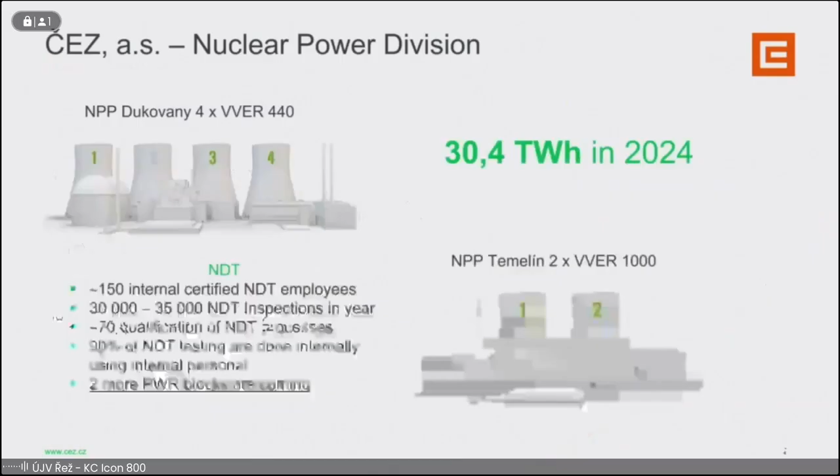We have 2 nuclear power plants here in the Czech Republic, one in Temelín, the second in Dukovany. All are VVER-designed, and the yearly output is around 31 terawatt-hours; 30.4 was in 2024, which is almost 40% of the Czech total power needs. So the nuclear division is a really important part of ČEZ and of the energy spectrum here in the Czech Republic.

Regarding NDT, what we are doing: right now we have approximately 150 internally certified NDT employees. That means 90%, and hopefully in the future 100%, of the NDT inspections we are able to cover ourselves. That's quite a huge number. The number of inspections this year is somewhere between 30,000 and 35,000 for both NPPs.

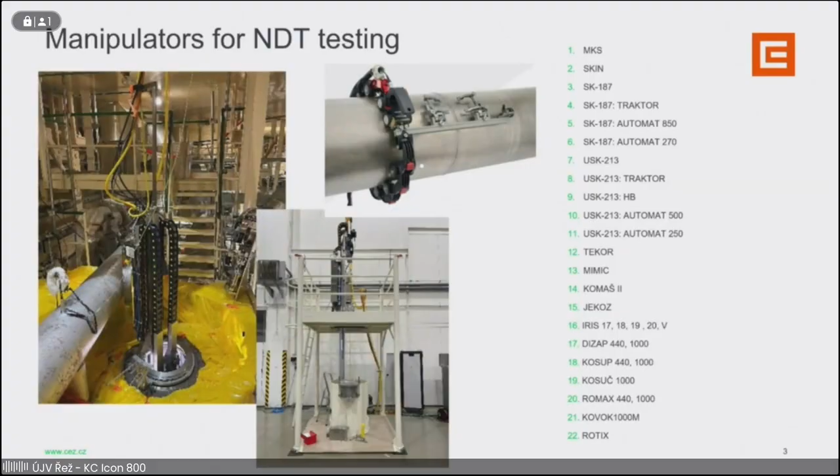So the question for today: why are manipulators so popular, maybe also a bit of an expensive topic? Why do we have to use manipulators for NDT?

Well, first, we have places in the power plant with high radiation risk, so radiation safety is of course really important. You cannot send a human inside the reactor pressure vessel, so you have to have a manipulator to perform the testing in there. So first is radiation risk.

The second, of course, is also the safety of the personnel, not connected with radiation, but you can have different types of problems in the technology which isn't really safe for personnel. So you will use a manipulator for it.

And third, there are more reasons why we use manipulators, but third is of course quality. The repeatability, the reliability, and lowering the human or personal influence of the operator is really important, and it has a high effect on increasing the quality of testing. So these are three really important points why we are using manipulators.

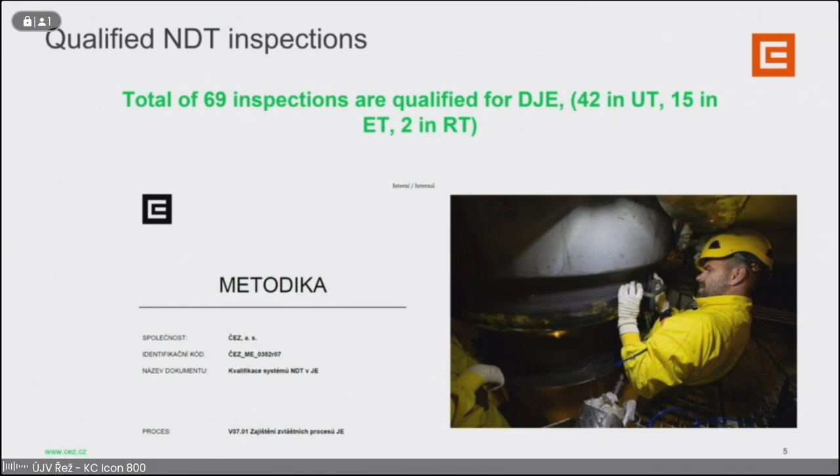As I said, we have 42 qualifications in UT, 15 in eddy current, 2 in X-ray testing and radiography of course. And let's just see three qualifications which are quite important for us.

Heat exchanger tubes of steam generators, VVER, Temelin, even Dukovany, so 440 and also 1000. As you will see later, we are using the IRIS manipulator for it, and we have a qualification for eddy current testing of the heat exchanger tubes, as you can see here.

The second, which is starting to be quite important, is dissimilar metal welds for small thickness piping using the phased array technique of ultrasound. The small thickness ultrasound testing is a bit challenging, but we have qualification. We are of course using manipulators and it seems to work pretty well.

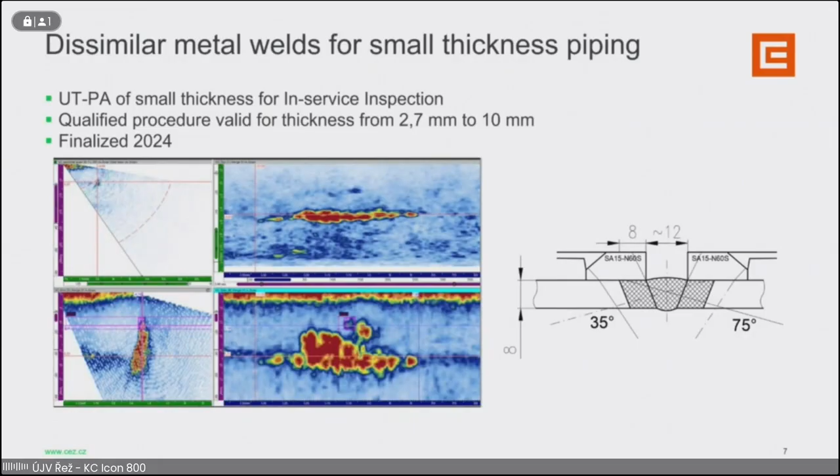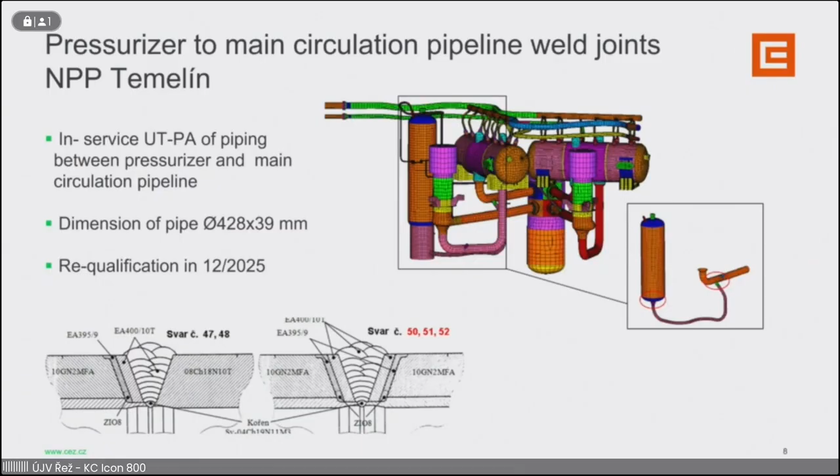And the third, just to show you, is a qualification for main circulation pipeline weld joints on Temelin NPP. You can see the line between the pressurizer and the main circulation pipeline. So this is the third qualification.

We put some of our manipulators into chapters to show you. First, we will look at the manipulators we are using for the reactor pressure vessel. The first and most important manipulator is MKS, which we are using for pre-service and in-service inspection right now, of the inner surface of the pressure vessel. Really important things to do.

This is the second generation of the manipulator. It is fixed on the pressure vessel, on the dividing plate of the pressure vessel, and you can perform UT, ET, and of course visual testing of the inner surface of the vessel. So this is a really crucial manipulator for us.

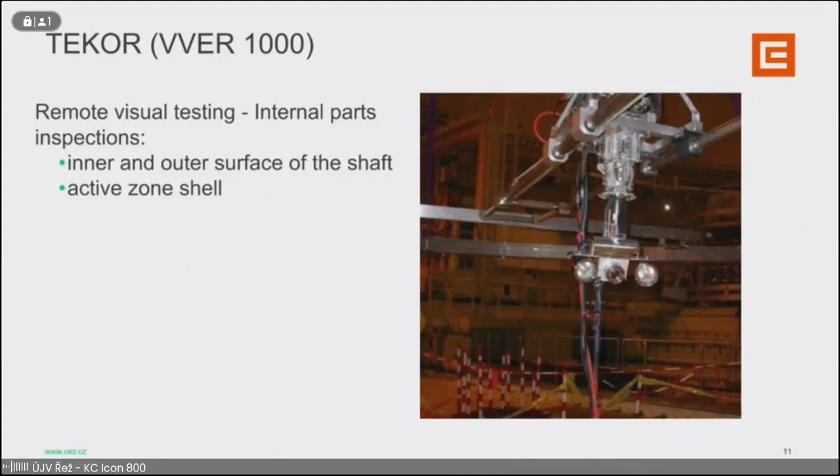And for Temelin NPP, we are using the SK-187, which are manipulators for the bottom part of the reactor and the outer surface of the reactor. Using eddy current testing and visual testing, you put the manipulator to the bottom of the reactor, and there is an arm which rises so you can also test the outer surface of the reactor.

And of course, for smaller parts of the reactor, not like the pressure vessel and everything, we are using manipulators such as, for example, KOMAŠ for bolts. So for UT and eddy current testing of the bolts, we are using this small machine.

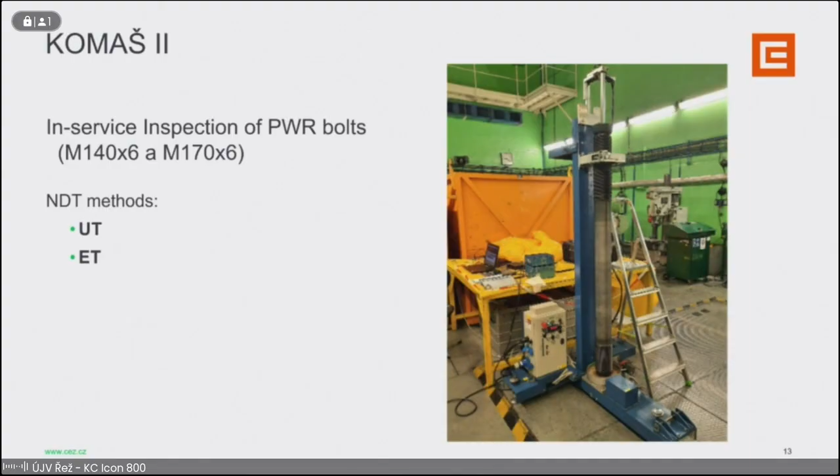The second topic is in-service inspection of the nuts and threaded holes, which we expect on the reactor. For this we are using eddy current testing and visual testing. Visual testing is propagated using a mirror, so you are watching not just the surface of the threaded hole from the top, but you can also see the surface from the bottom using the mirror.

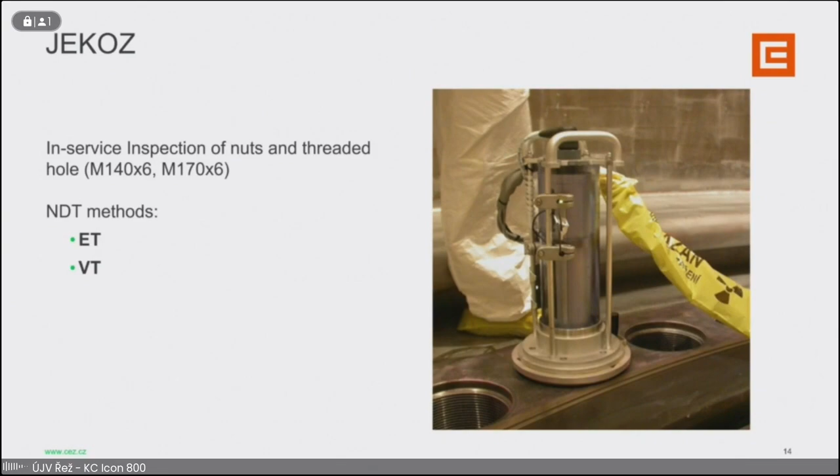Another quite important and challenging part of VVER design are steam generators. For steam generators we are using the Iris manipulator, which is quite a machine - we can do lots of things using this, and I think it's the second generation of manipulators for it. Mainly we are testing the heat exchanger tubes, but we can also test the surface of the collector, using ultrasound and eddy current testing. We can change the head for penetrant testing and also visual testing - everything is propagated by changing the head. So there is a body of the manipulator, and you change the head based on which NDT method you want to use. Right now we are thinking about preparing a new generation of manipulators for these kinds of testing.

Again, same as for the reactor, we have to inspect the threaded holes. For this we use the DIZAP manipulators. As you can see, for eddy current testing and visual testing, we can test all the threaded holes in the upper part of the collector of the steam generator.

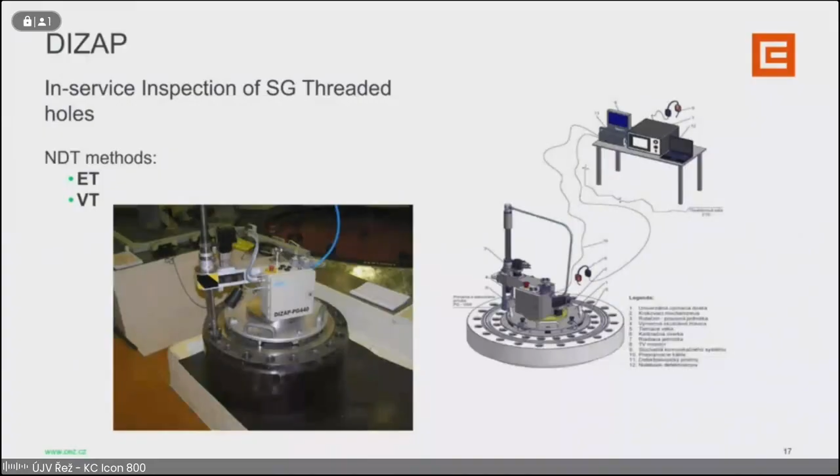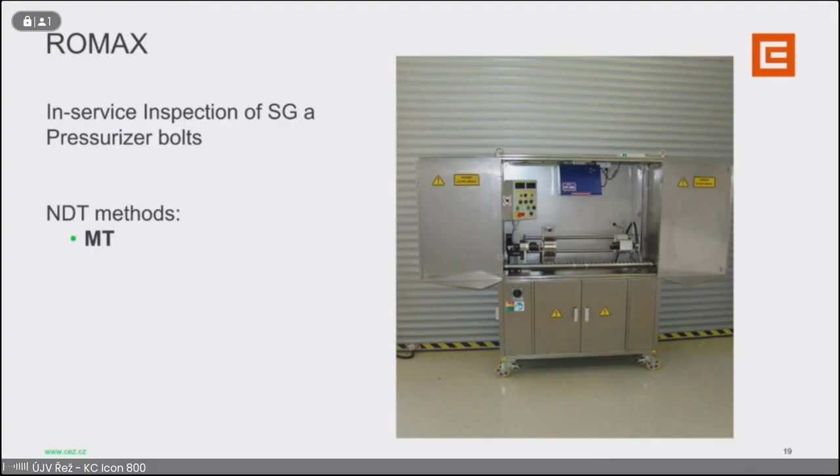COSUP is again a small part of the steam generator, mainly bolts, where we are using ultrasound and eddy current testing. And of course for bolts there's also ROMAX, which uses magnetic particle testing.

This was just the main manipulators which we use for big equipment, but we have many more manipulators that are smaller - or okay, KOVOK is not smaller actually, but can be smaller, can be modular, can be semi-mechanized - and we use it mainly for ultrasound testing. That's really important for us from the point of view of repeatability, which is becoming really important, mainly for Dukovany NPP, because as you all know Dukovany NPP is not really new, so we have to assume long-term operation of the unit. For long-term operation, and to precisely do the long-term operation calculations and everything, you also need really good repeatability in NDT testing. That's why we are using lots of manipulators for ultrasound.

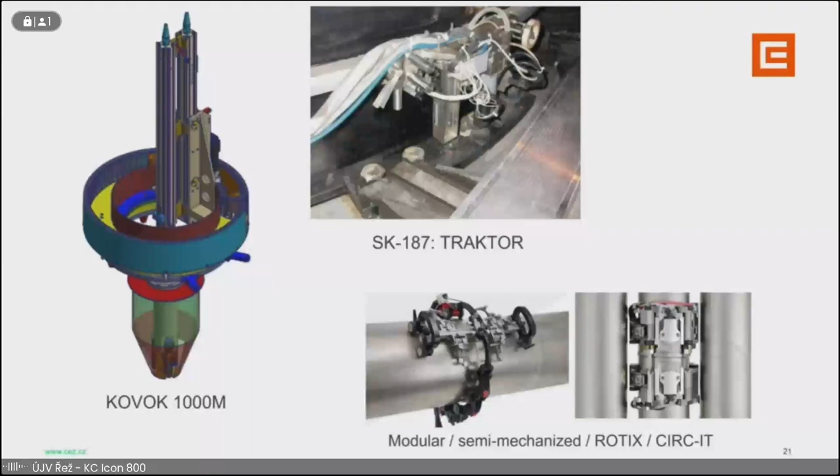That's really important stuff that's going on right now.

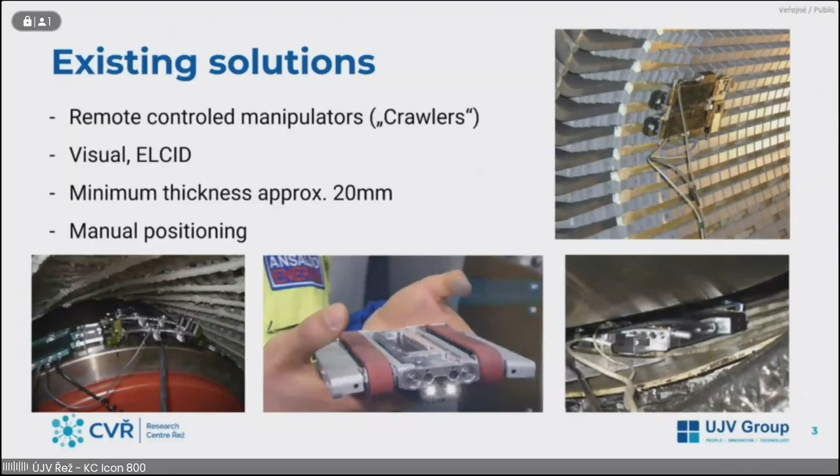So we set our design criteria, mostly the thickness, which we set to 14 millimeters. We also wanted to do double axis motion, so it could go up and down and sideways also. We want to use visual test and ELCID.

For ELCID, it's not on the manipulator itself, because the technology is quite expensive, but we made an interface for ELCID. We also plan to include all the necessary cables for running the ELCID, like power and data lines, well, everything that is needed for it.

We made the manipulator to fit various designs of hydro generators. That means mostly the diameter of the rotor, which may vary, so it can fit a wide range of diameters, and also the span of the poles, so it can go over them. It may be better explained on the next slides.

So this is the manipulator, one is a 3D model, the other is a picture of the real thing. So far it's made of plastic by 3D printing for the main body, but when it's 100% finished, it will be made of aluminium. So the materials are mostly aluminium and stainless steel.

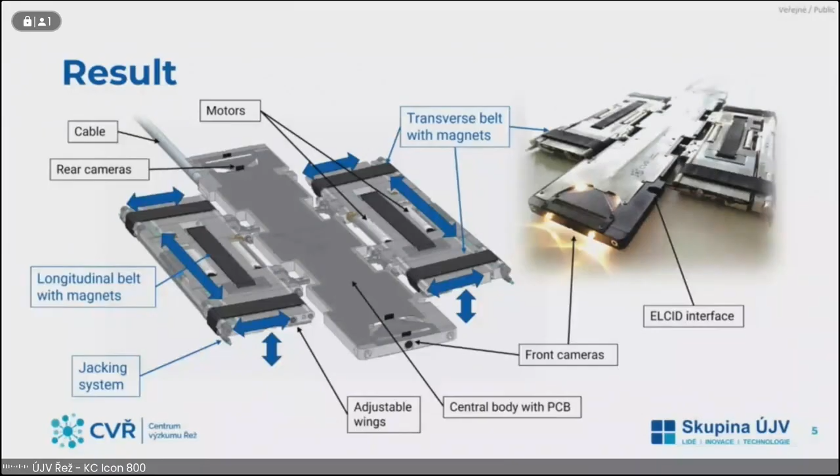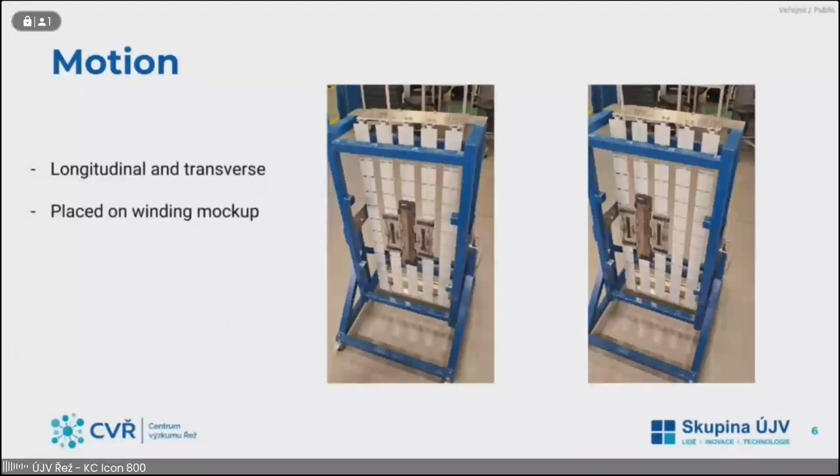In this video you can see the manipulator moving in the longitudinal direction. We use a mock-up we made, basically a steel structure with a surface that resembles the winding of the stator, and it can be interchanged for other parts so it can simulate the rotor also. It's quite handy, it can be placed vertically or horizontally, and we are testing the movement there.

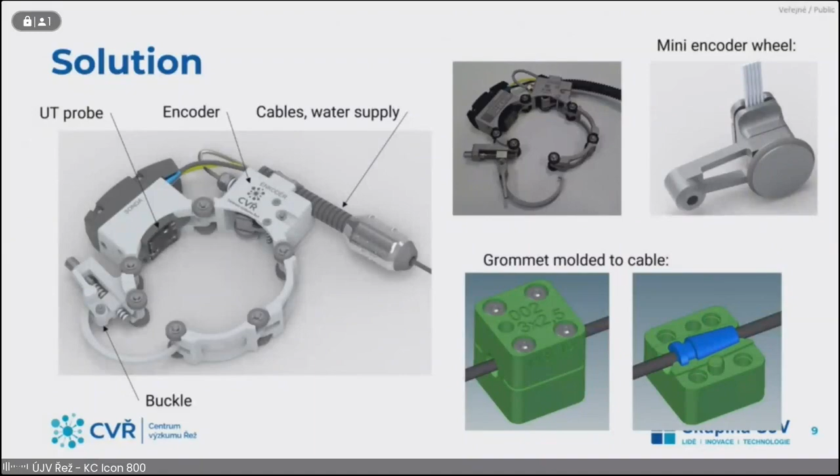This manipulator was commercial, so we sold it to the client as a final product. It was packed in a suitcase with all the manual and everything. The first manipulator was for a grant project, so there were some things that were a little bit sloppy, for example the control panel, but this one has to be 100% finished and perfect.

That reminds me, I've seen some questions for the panel discussion asking if we are able to supply manipulators for power plants. So yes, we are - this is one of them. We have about 5-6 references of manipulators that are actually used on power plants for inspections. We supplied, I think, 2 pieces of this one.

There's a video from testing on the sample of the insulator. You can see it's connected to Zetec Topaz, a standard commercial device for ultrasonic testing. So it was proven that it works.

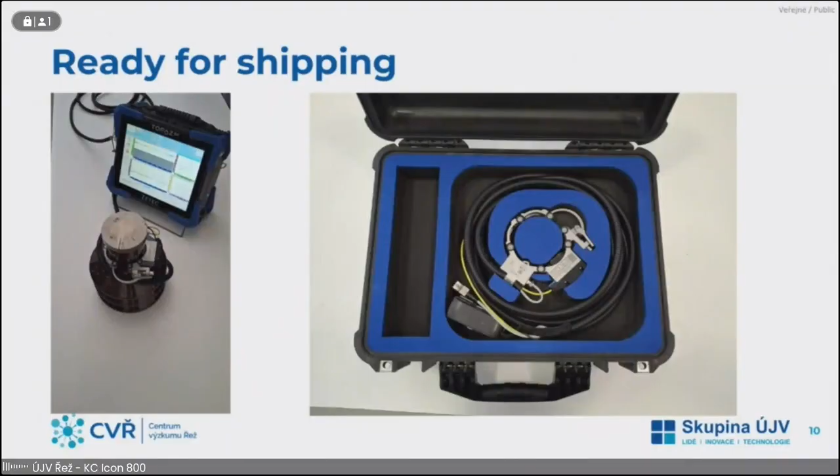That was it, okay, thank you. As I said, you can see both manipulators on the tour. So if you want, we are looking forward to seeing you there. Thank you.

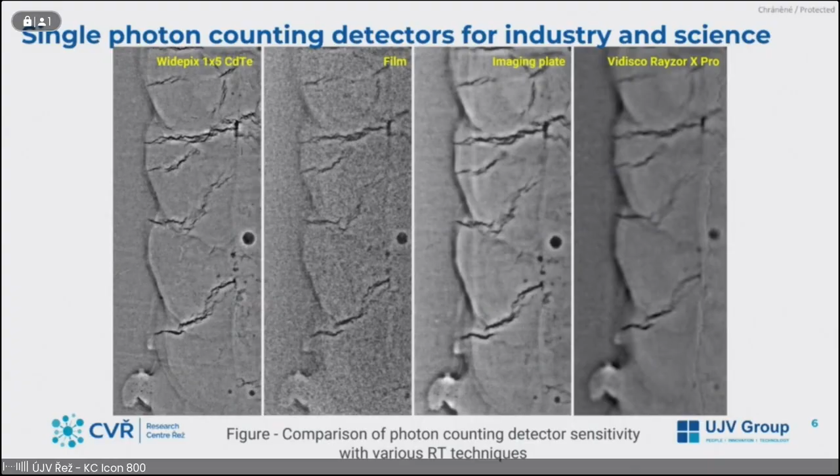On this slide is shown the capability of the detector. On the left side you can see the result from the Widepix sensor, then film imaging plate, and Vidisco Rayzor X Pro. So you can see that their sensitivity is very high.

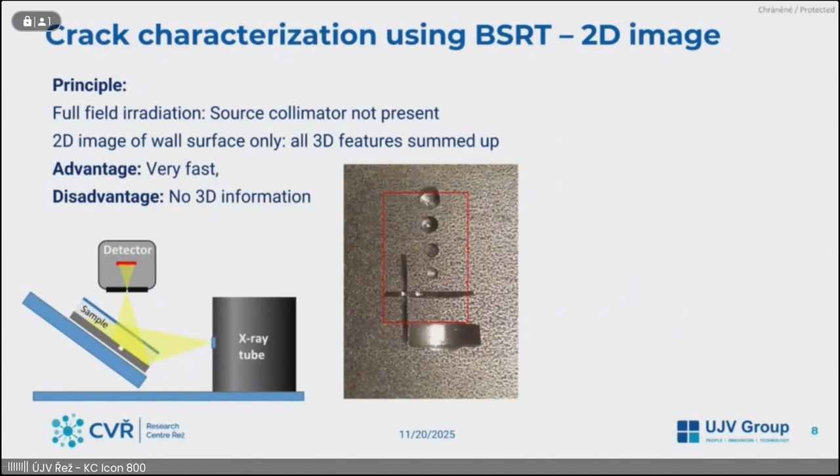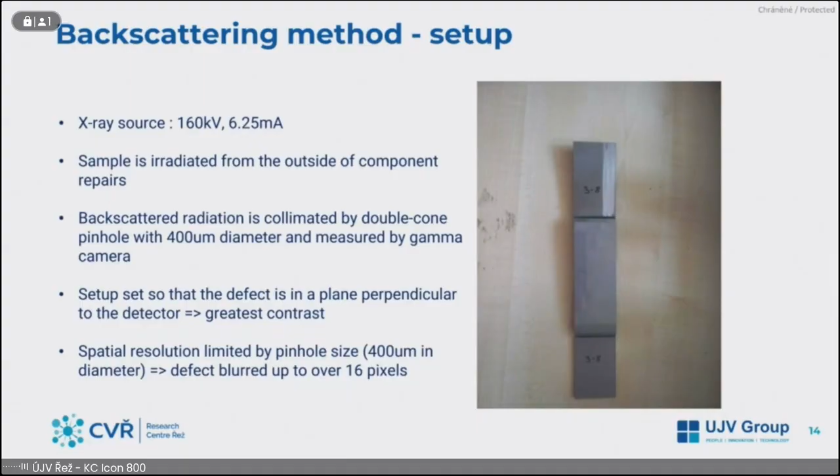Now I would like to show the second case. We had this test specimen; it looks like a repair of liners. In this case there are 3 base layers: aluminum, polymer, and a metal-based base material. We again fabricated artificial defects, crack type and holes. On the right side you can see that even though we went through 2 layers, aluminum and polymer, we could detect defects on the inner side of the metal part.

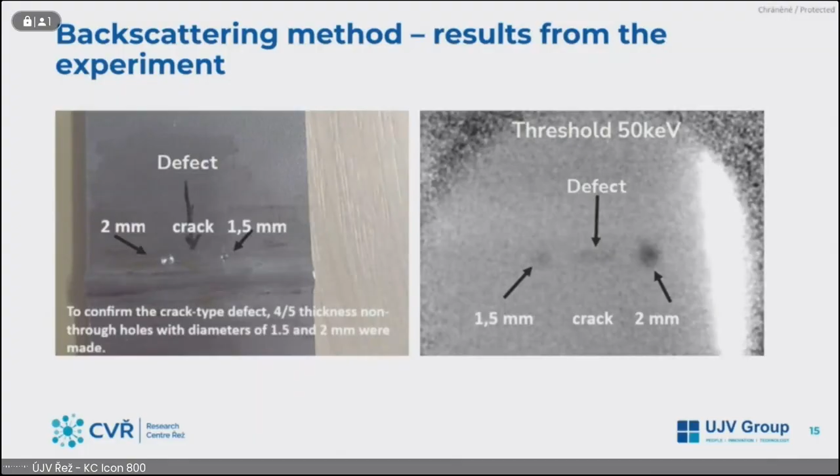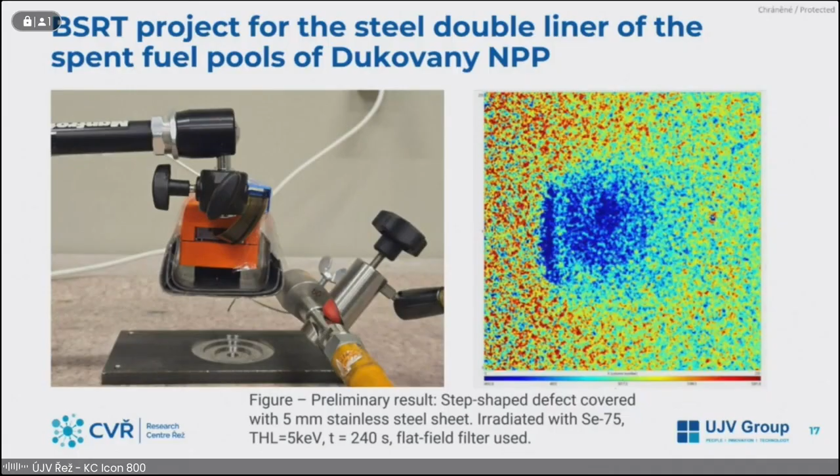On this slide, I wanted to show you that we performed many pilot measurements, and the first successful result was looking like this. In this case, as the source we had selenium 75.

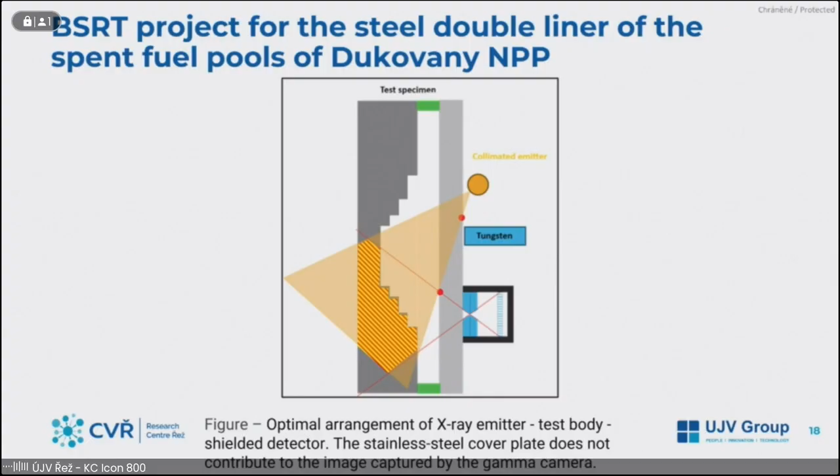Then we had again many discussions on how to improve the experiment. We had to use tungsten to shield our detector from photons going from the austenitic steel and from the X-ray source. And the result you can see here.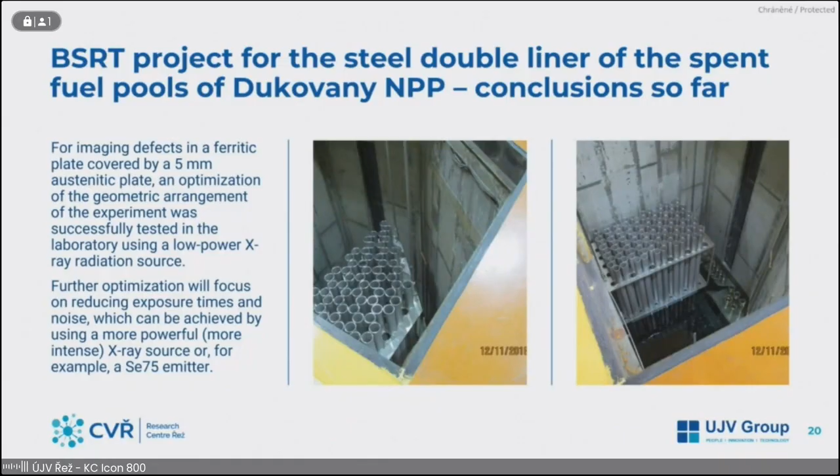After that, we suppose that we will have a contract with ČEZ to manufacture a manipulator. Drawn pictures of the spent fuel pool you can see on this slide. We will have to perform these measurements, let's say, around 5 meters from the surface of the reactor hall. So this is information about the first running research and development project.

The second project is about developing NDT methods for detection not only of voids between the liner and concrete, but also to detect water in these voids. The project started in January this year, and the end is March 2027.

When we perform pilot measurement, you can see if you use a simple hammer, you can recognize by ear the presence of voids. We also perform impact measurement using vibration sensors, and it was the proof to persuade ČEZ people to run this project. We are also trying to develop impact hammer testing using vibration sensors.

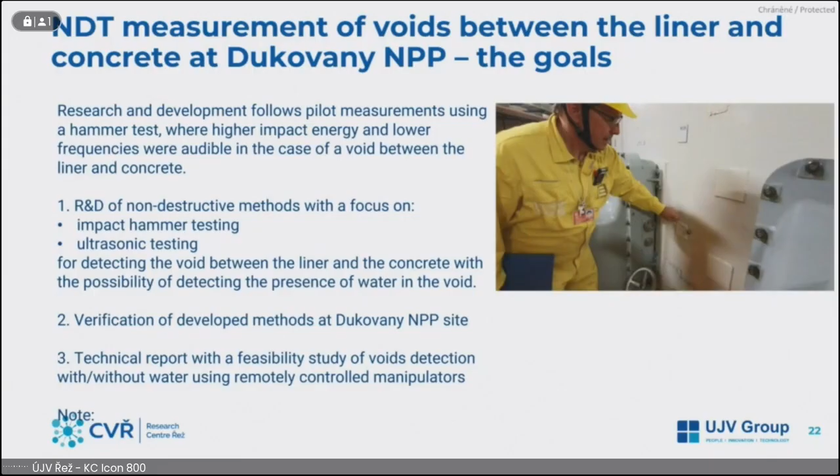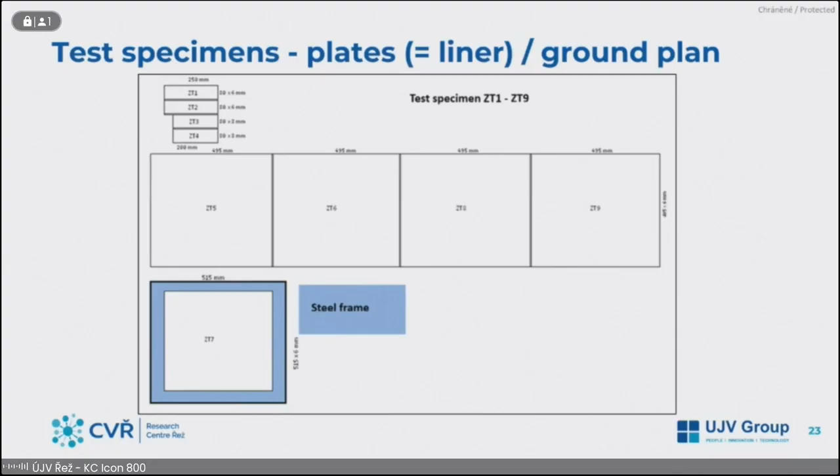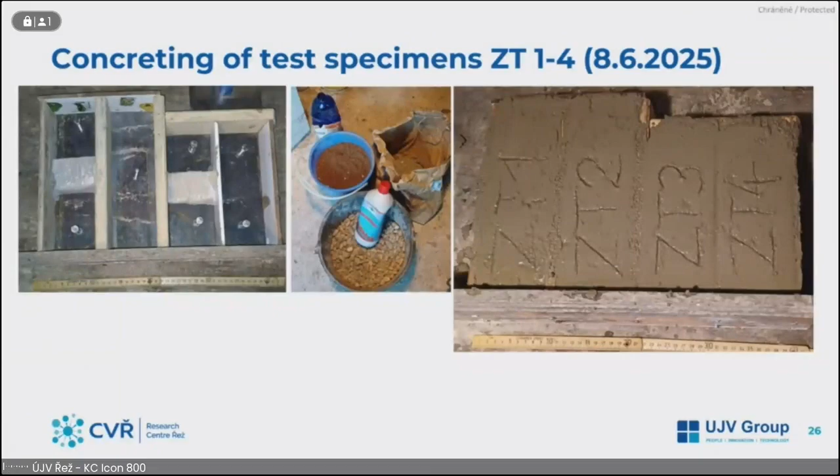We also have calculation support, so for test specimen ZT7 we performed simulations. What is important is that we simulated what will happen to the eigenfrequency of the test specimen when we put water between the plate and the concrete. If there is zero water column, the frequency is something around 450.

A 2-3 millimeter water column causes a drop of the frequency, a 20 millimeter column causes another drop, and if there is a 300 millimeter water column, then you can see that the eigenfrequency moves from 450 to 300 hertz.

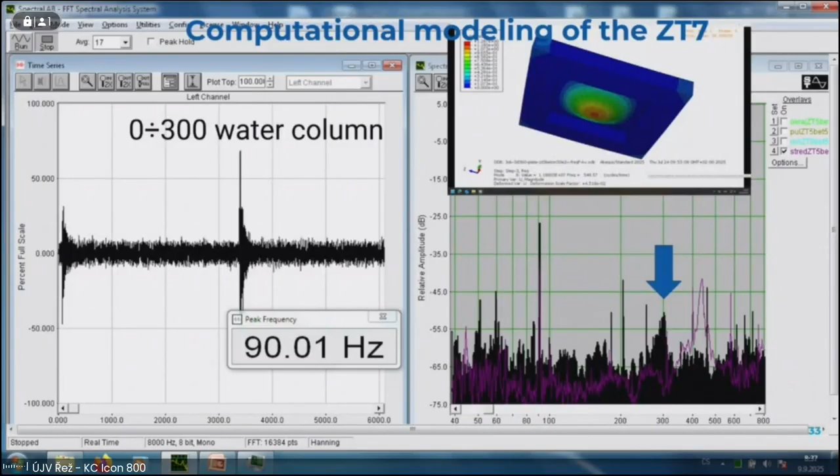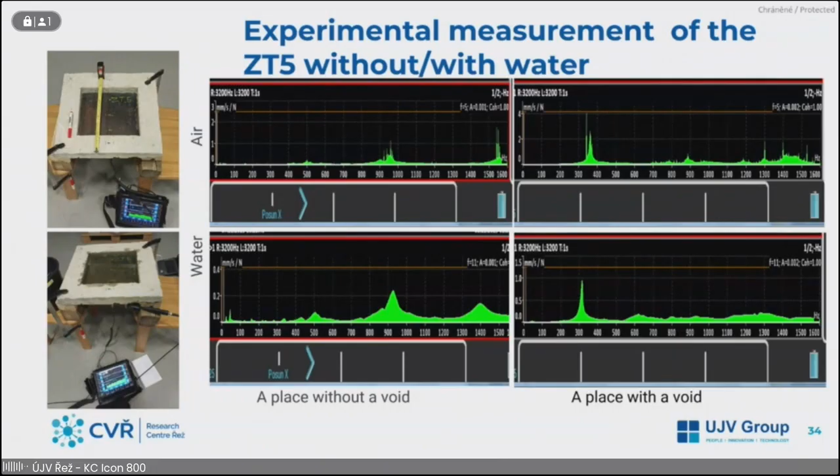What you can see on the right side spectrums is that the frequency moved from 350 to 300, and also the amplitude dropped from more than 2 millimeters per second per Newton to less than 1 millimeter per second per Newton. So it works.

On the middle display, you can see that between echoes from the plate and the backside of the plate, there are small echoes from the concrete. As for phased array, we have some results, but it's still under development.

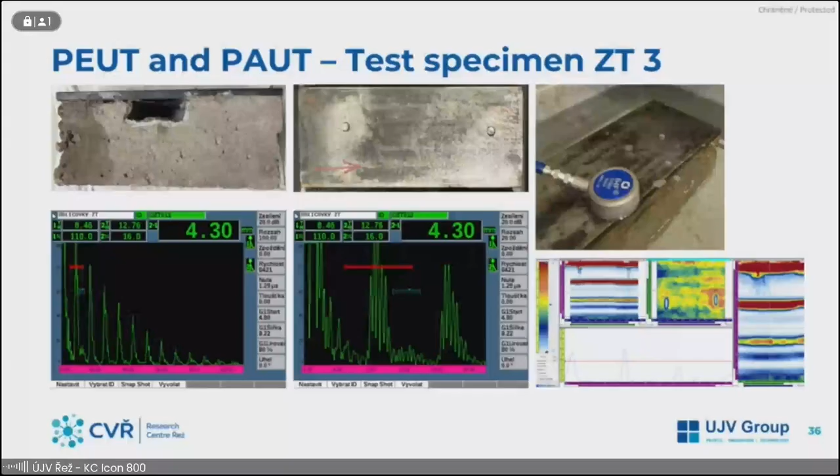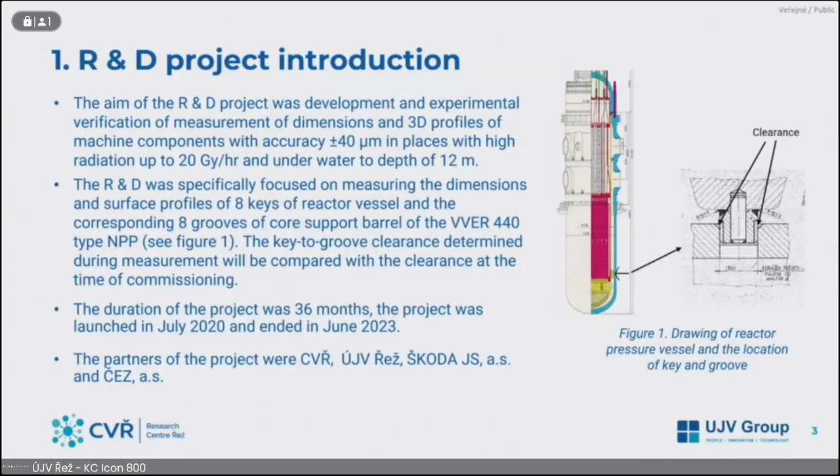What were our limitations and requirements from the plan was that the inspections would take place at different times of the outage, because the measurement of the keys would be performed when inner parts are out and when the reactor vessel is full of boric acid, 16 grams per kilogram.

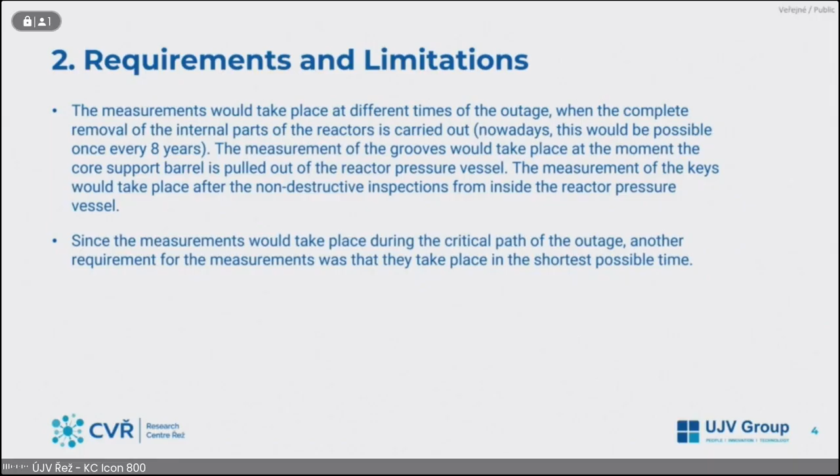What concerns the grooves, these measurements would be done in the air when they are moving to their position during the outage. Although the requirement was to perform these inspections in the shortest possible time, because the inspections would be on the critical path of the outage.

Grooves would be in this window, and the core barrel would be on the crane, rotating. In this way we could measure dimensions of grooves. And although radiation would be too high.

What concerns measurement inside the reactor, Mr. Kolar showed the MKS manipulator, originally developed by Škoda Machinery, which is used for inner inspections of the reactor vessel from the inner side.

This manipulator has a vertical part and a horizontal frame, and on this horizontal frame would be put our developed equipment for inspection of the keys.

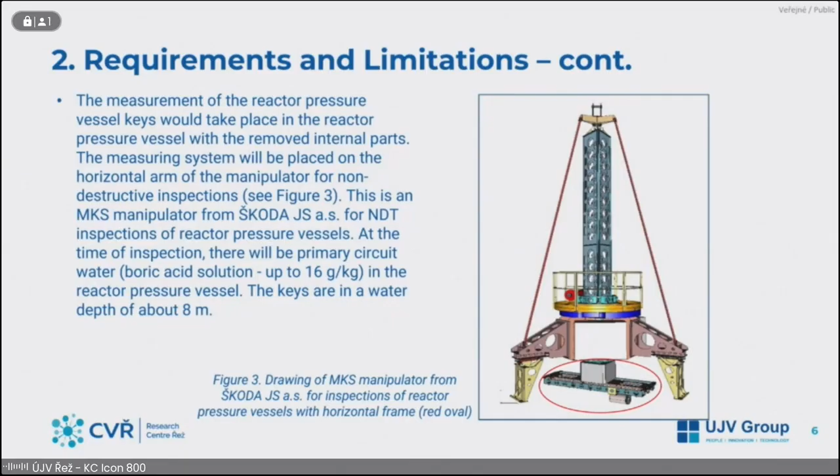We also fabricated some artificial defects. What concerns the 3D camera system, we made a decision that we will perform using GoPro cameras, video sampling videos, and using lasers, we can then perform 3D measurements.

And what is also important, when you have this data, you have to have software to get a 3D point cloud. So that's what were the focus areas for this project. And now what was developed?

We developed two measuring systems: 3D cameras and replicators, and both of them had to be developed for keys and grooves, and they look a little bit different.

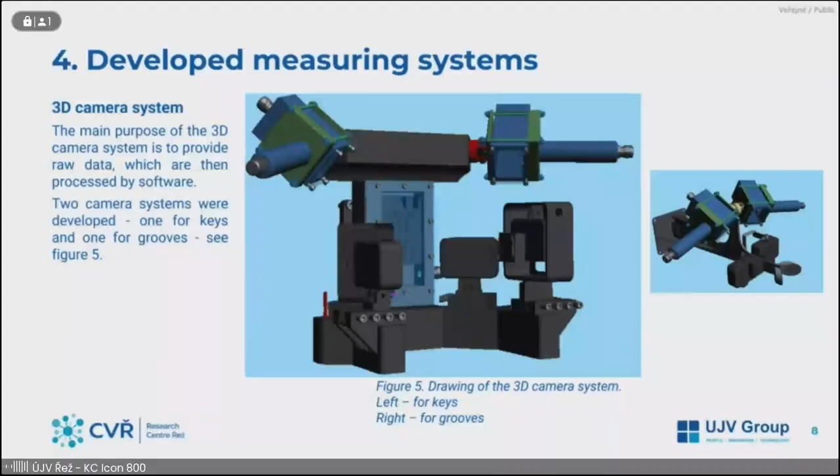In the middle is a drawing of the manufactured 3D camera system. We were using 4 GoPro cameras, 3 lasers. What concerns grooves, because we would measure inner surfaces of grooves, we would just need 2 GoPro cameras.

What concerns replicators, in the middle is also the manufactured replicator for grooves. And on the right side, you can see the construction drawing of the replicator for keys.

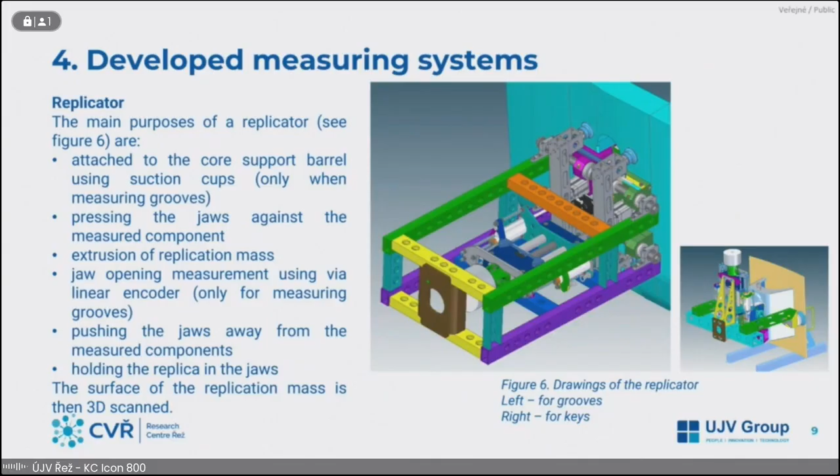These measuring parts, a 3D camera system or replicator, would be connected to what we will call a manipulator. With this manipulator we could perform precise movements in 3D directions, axis by axis.

For measuring of grooves, we had to develop a heavy fixed frame, and you can see that this fixed frame also had one motor driver for moving the manipulator to the measured component, and on these drawings you can see how the manipulator would be connected to this fixing frame.

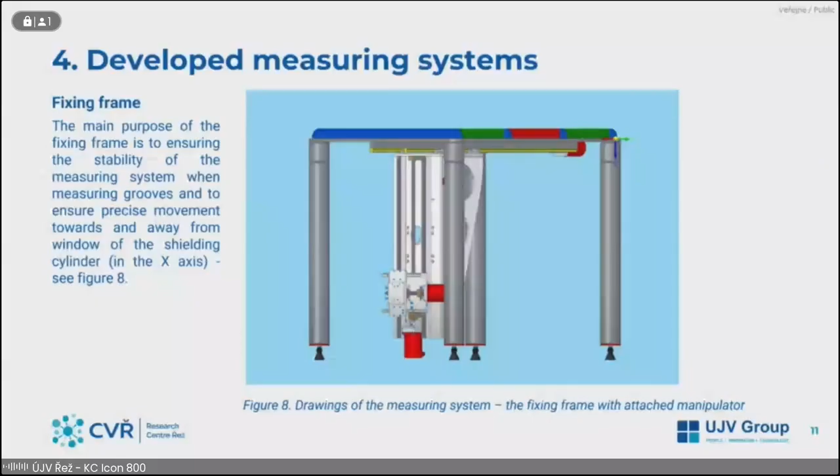Now to the verification tests. Because we were using the remote replica in radiation conditions, we performed stability tests of this replica for radiation, with a dose of 40 kilograys at a dose rate of 2 kilogray per hour. When we compared precise 3D scanning of these replicas, we didn't recognize any changes.

We maybe accidentally put these cameras to a dose of 180 gray per hour, and what we could see is that yes, there is noise, but because we were performing video recording, this noise was random.

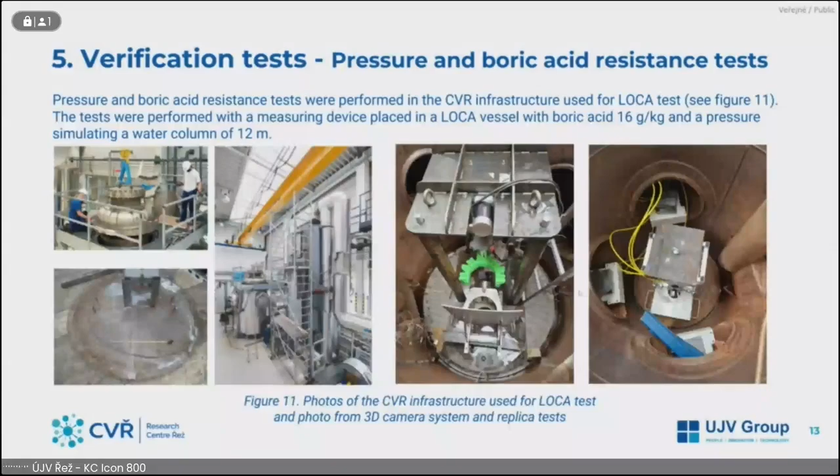The big test was performed in the Škoda Machinery Hall. They had a pit.

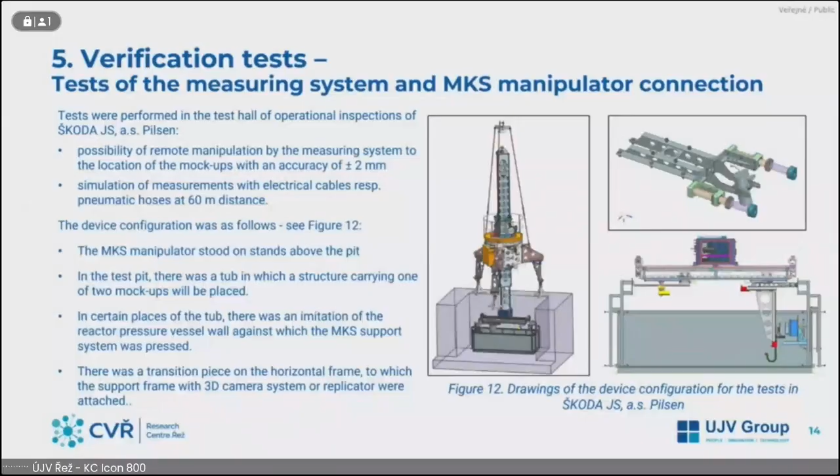There was a big pit. In this pit was a tub, and in this tub we installed testing of the 3D camera key mock-up. For a replicator we installed groove mock-up, and we had cables and everything for simulating 60 meters from the place of the monitored component, and everything was working properly.

The last test I would like to mention is the verification test of the 3D camera system. We had some problems with accuracy, because we should go to 40 microns plus minus, but at the end we proved using our verification calibration block that we could go to 52 plus minus microns on 80% of the surface, but on the whole, let's say 90 microns. Still, we think it's a very good accuracy for this 3D camera system.

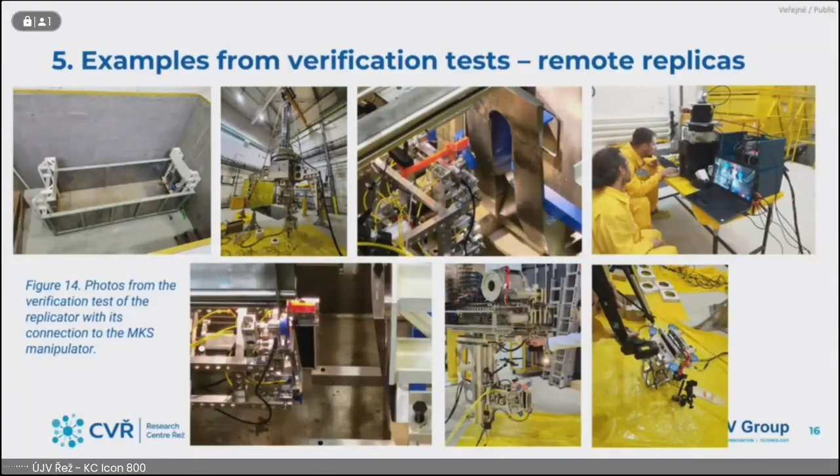Here I would like to demonstrate the verification test for remote replicas. Here we perform the verification test. On the left photo you can see the fixing frame, then a manipulator connected to the fixing frame, then the replicator connected to the manipulator, then this wood window simulating the window of the shielding cylinder, and behind this wooden window is the groove mock-up.

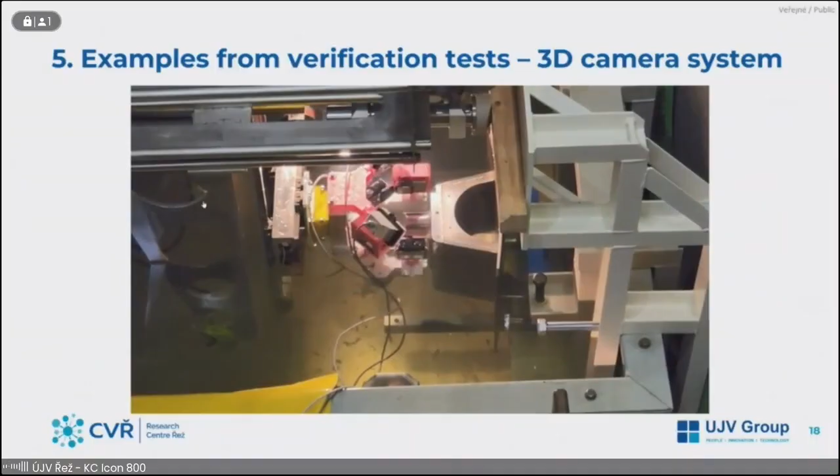Here I have a video from the 3D camera system verification test. You can see lasers. We were using the key mock-up, and it's demonstrated here that it was working.

We are using this measurement as an in-service inspection of the wet fuel storage tank of the CVR experimental reactor LVR-15. After scanning the replica, we can get the results. You can see the curve picture below, and we check if the defect is not growing.

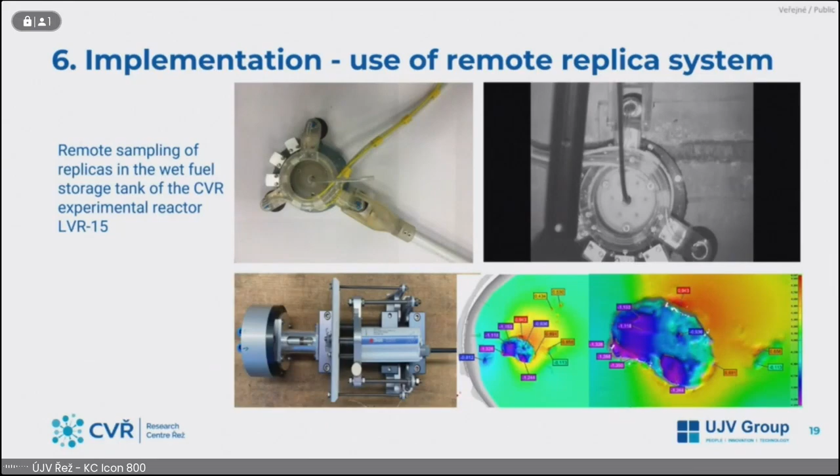Concerning the 3D camera system, it was mentioned, or it will be mentioned by Mr. Martin in the afternoon, that for our customer ČEZ, we developed a system for VT inspection of the threaded holes of VVER 440, VVER 1000 steam generator collectors. Maybe it was mentioned by Mr. Kolář, no?

We are using a mirror, then a GoPro camera, and from the video we can get as a result this gray photo. This is a photo of the threaded hole, and we can also get information about defects. In this case, we are speaking about 100 microns size of defect.

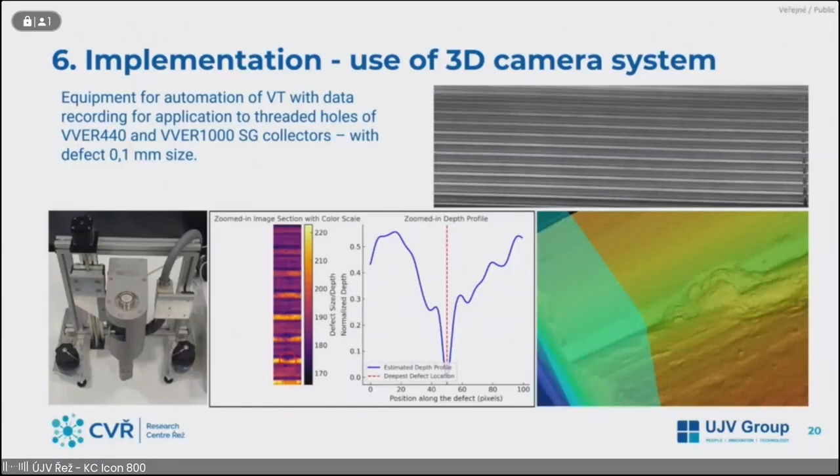I think this is also, let's say, a masterpiece of our colleague, Mr. Marcin Kopec. Here, the technology of the 3D camera system is now being implemented for inspection of fuel rod surfaces, and up to now we could achieve an accuracy of 6 microns.

Thank you very much, Jaroslav. Are there some questions now? If not, I have some.

You mentioned many times using cameras and sensors, and there are really specific conditions during the measurements and so on. Is there an issue with damage to the sensors, with reliability of them? If we speak about 3D cameras, if the radiation dose is too high, then what does a GoPro camera cost?

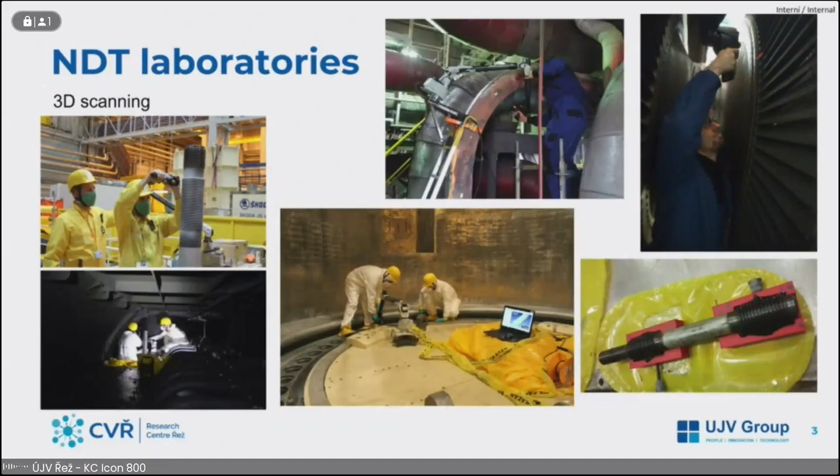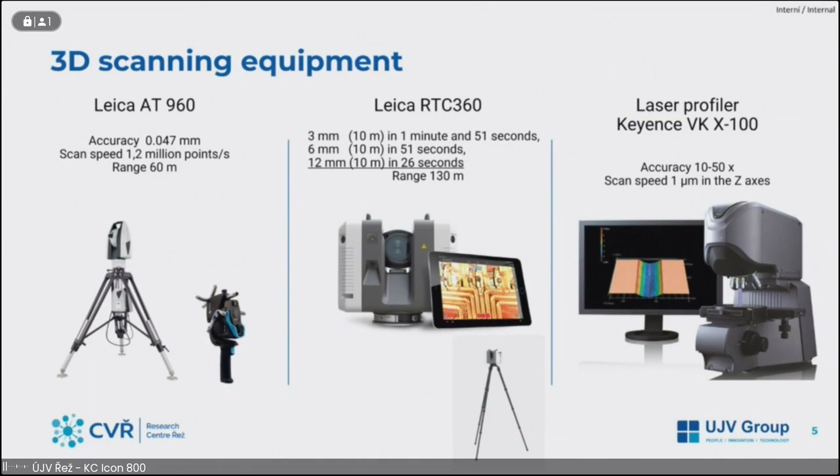So now let's go to examples of applications at nuclear power plants. The first example is scanning of main circulation pump bolts. This is the most common and perhaps easiest application.

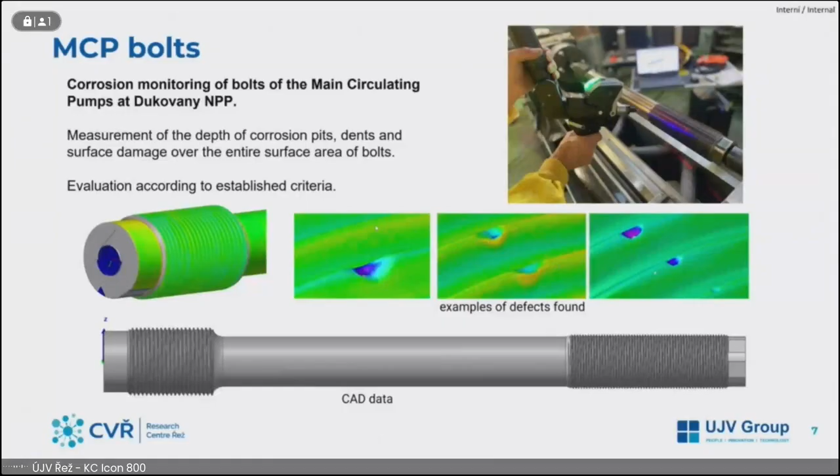We scan the whole bolt and align it to CAD data, and we can then create a color map which reveals all defects by means of different colors, and then we evaluate each one individually. We mostly look for corrosion and pitting, but also dents and scratches are common defects here. So on this picture you could see how the measurement is performed on the top right, and here is the evaluation of some examples of defects found on this bolt.

The second example is scanning of sealing surfaces of Temelín NPP flanges on a reactor pressure vessel head. The goal is assessment of the geometry of two sealing surfaces of the nozzle. It's a nozzle of the control drive mechanism on the upper head, reactor head, and we scanned all these nozzles. There were two types of 3D measurement: measurement of imprints and deformations on each of the two sealing surfaces, and measurement of mutual distances and flatness deviation of these sealing surfaces.

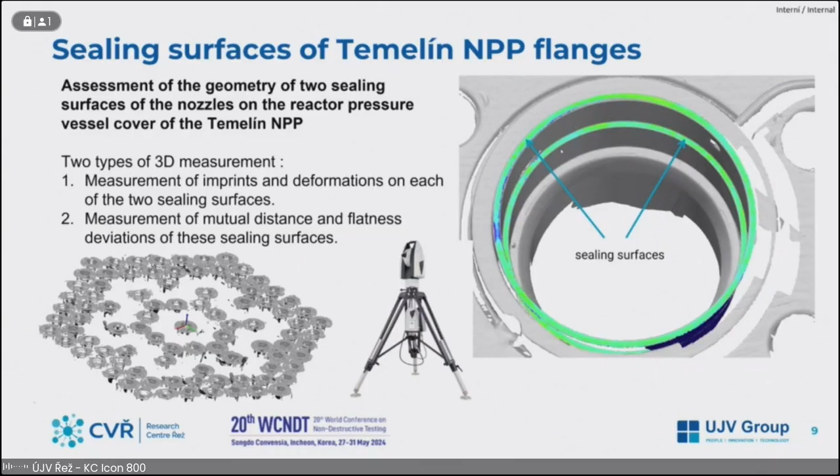The next example is scanning of the guide groove of the wedge of the main closing valves of the primary circuit. This measurement was quite challenging due to the confined space inside the shaft and the high radiation levels at the bottom of the shaft. We used a handheld device called HandyScan, which we mounted on a custom designed pole with adjustable angles. This setup allowed us to lower the scanner all the way down the shaft and move it up and down during the scanning process.

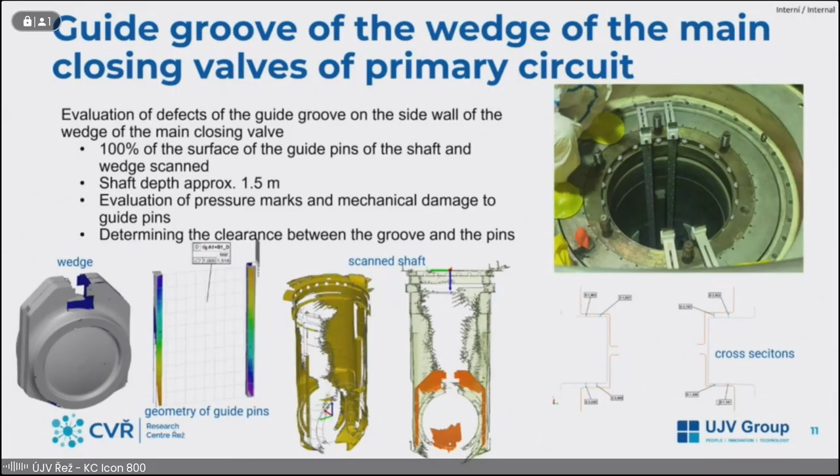The obtained data were analyzed for surface defects and overall geometry. The wedge was scanned separately outside of the shaft using a hexagon arm and evaluated in the same way as the shaft. Later, both scans, the wedge and the shaft, were combined. See, here is the shaft and here is the wedge, combined in a simulated closed state to determine the clearance between them in several cross-sections as shown in this picture.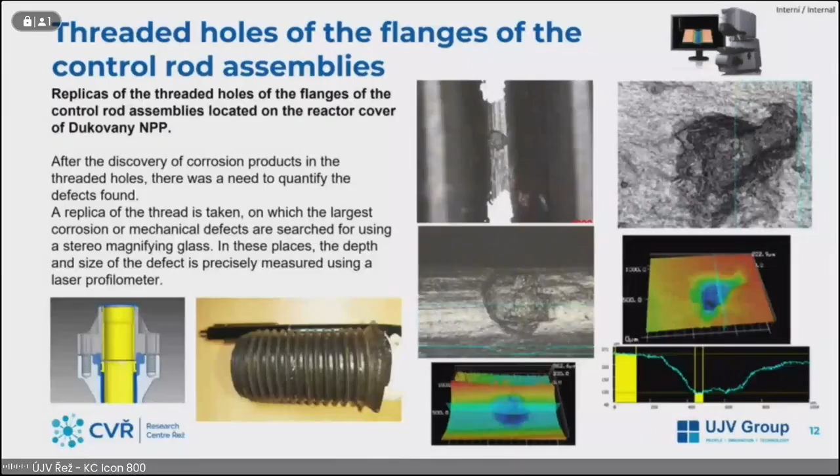Now I would like to show you some examples from fossil power plants. This example is our first application of 3D scanning at power plants.

It was for steam turbine blades, and the goal was to find a method for detection, sizing and location of corrosion pits. In some steam turbine low pressure blades there are corrosion pits, and these corrosion pits were the initiation for cracks, so it could be quite dangerous. It was necessary to evaluate their dimensions and locations, so the 3D scanning method was very useful for that.

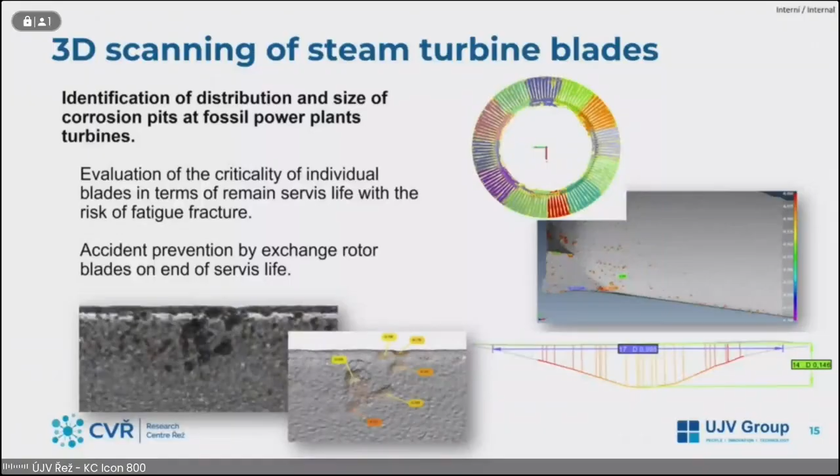After the scanning, based on mathematical modeling, we perform an evaluation of the criticality of individual blades in terms of remaining service life with the risk of fatigue fracture. This measurement and evaluation of criticality prevents issues by allowing exchange of rotor blades at the end of their service life. The second example is scanning of steam pipelines.

Here is another example of reverse engineering which we performed on our research reactor LVR15. On the left side, it looks like a mesh, but it's data scanned on the top of the reactor. From this data, along with some documentation, we created this reverse engineering model of the entire current state of the equipment in our research reactor.

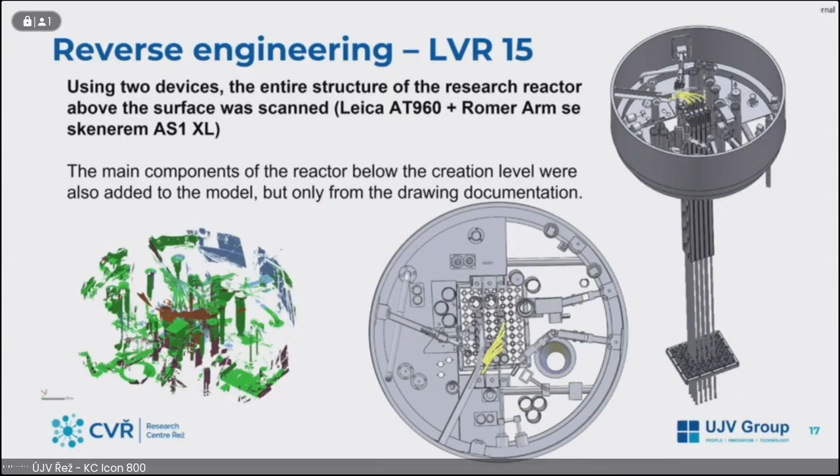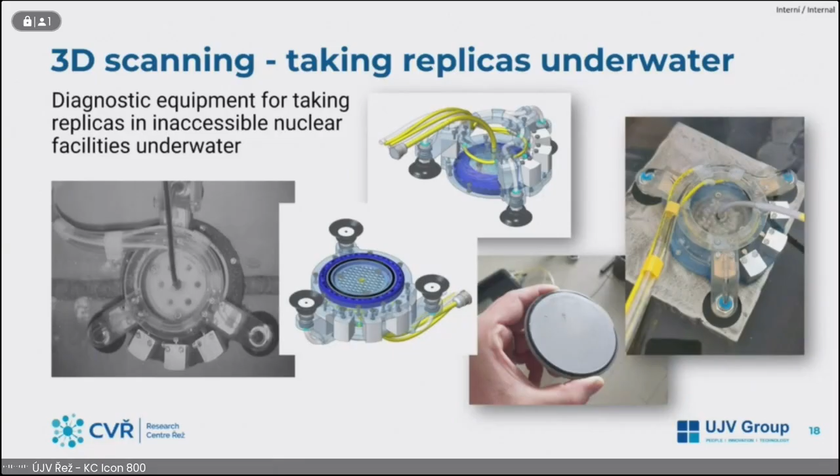So for conclusions, what is very important: 3D scanning looks like an easy application. You take a 3D scanner, and then you have a 3D model. But for most of these examples, there was minor and major research required before deployment as part of the in-service program of a power plant.

Some of these applications even require their verification. In these cases, the European Network for Inspection and Qualification methodology principles were applied for our power plants. 3D scanning can be characterized as a new inspection method that provides a new type of results to evaluate the current state of components. Along with the ongoing development of scanners, which will continuously improve their accuracy, this method will be used increasingly often. Thank you very much.

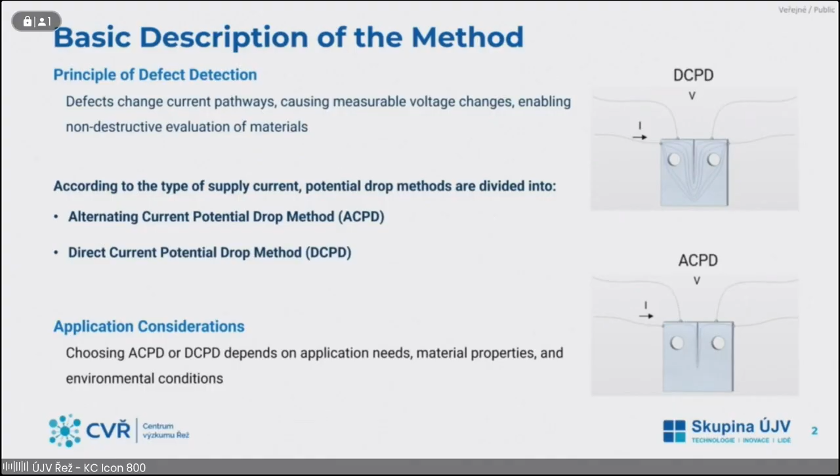Application of AC or DCPD depends on what we need regarding material properties and environmental conditions.

Potential drop method application is usually in the detection and monitoring of cracks, measurement of the wall thickness of components, steel components, measurement of corrosion losses, and monitoring of material changes.

Application in material laboratories is standard, usually for measuring defects and material properties. A new application in industry is for monitoring critical parts with selected components in the power industry. Usually it's used for steam pipelines and component measuring, and sometimes it's possible to use for construction, chemical, or other industries, and the environment must be suitable for this application.

Current use of this method has been in power plants, thermal power plants, for several years. We use this measuring system in pipelines with high temperature up to 550 degrees Celsius and pressure up to 15 megapascals.

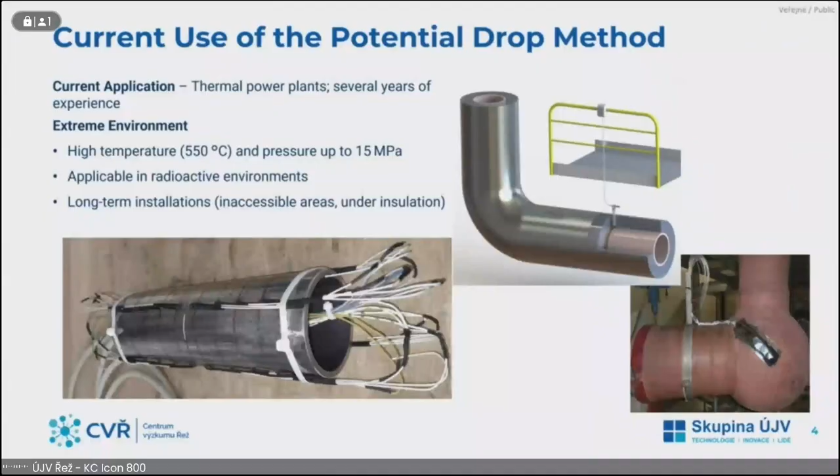Because we have had fewer experiences with this potential drop method in industry, and we used commercial systems for measuring that were not accurate or didn't give correct data as we thought would be better, we prepared our new request for developing new equipment.

We have two projects for this. The first, named DROPOT, is to develop a mobile or portable version of functional devices. Our customer for this is ČEZ. This project started in 2024 and finishes this year, and we produced a functional prototype of a mobile version of this device.

The second project is an online system for measuring and for remote monitoring. The name of this project is PotMet, from potential drop method. This is an internal project on our side, and it started in 2023 and finishes next year.

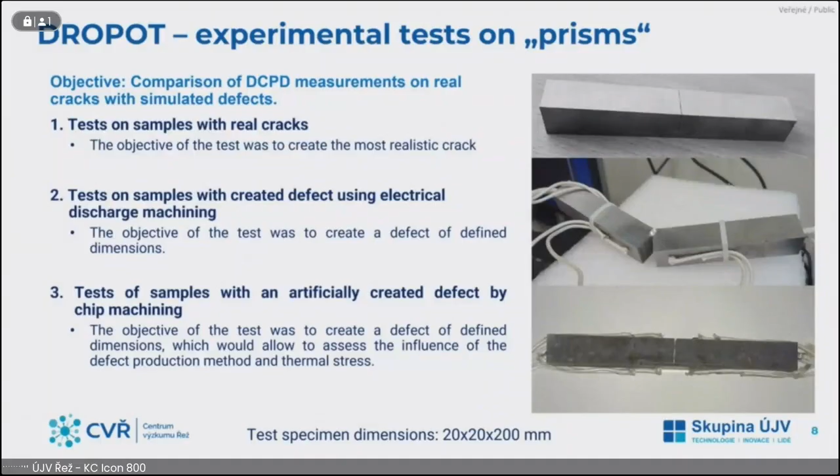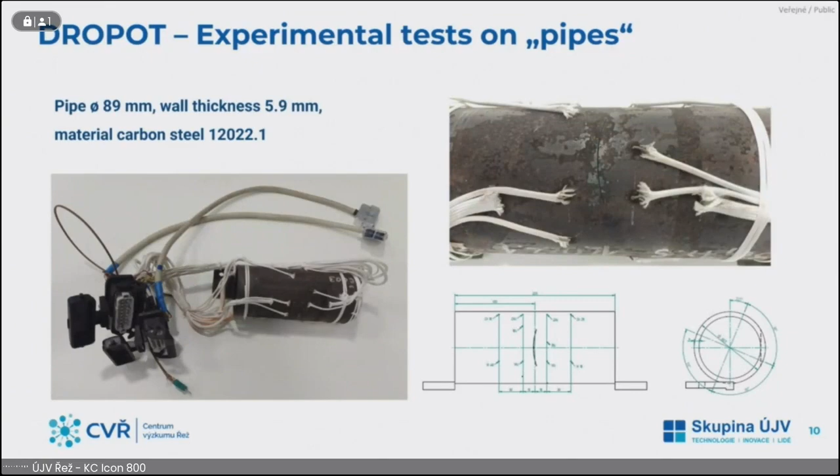If we have good experiences from this first test, we continue to the pipe test samples, but we change the thickness of the wall, change the position of the defect and angle of the defect, and prepare some special metrics of the connection electrodes on the surface, and combine the electrode system to find the correct sensitivity for the measuring.

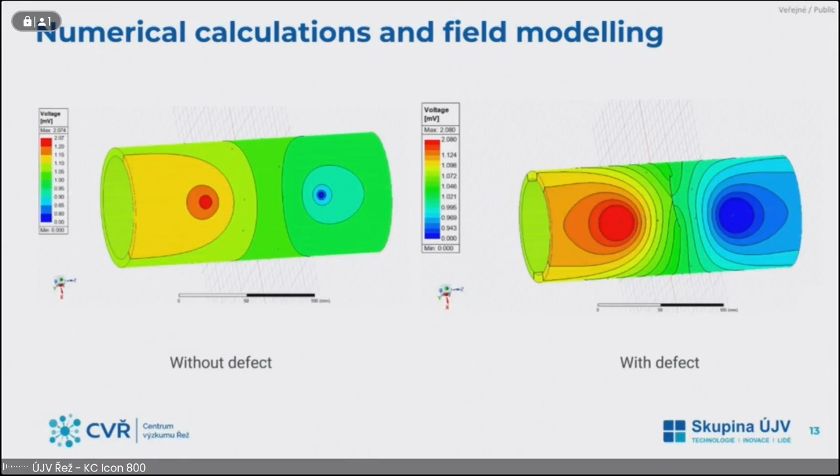Our new equipment has lots of variants for the connection. The main part is the measuring units. This measuring unit, pardon, is possible to connect to the evaluation unit directly, or it's possible to connect by routers, 2 or 3 outlet connectors.

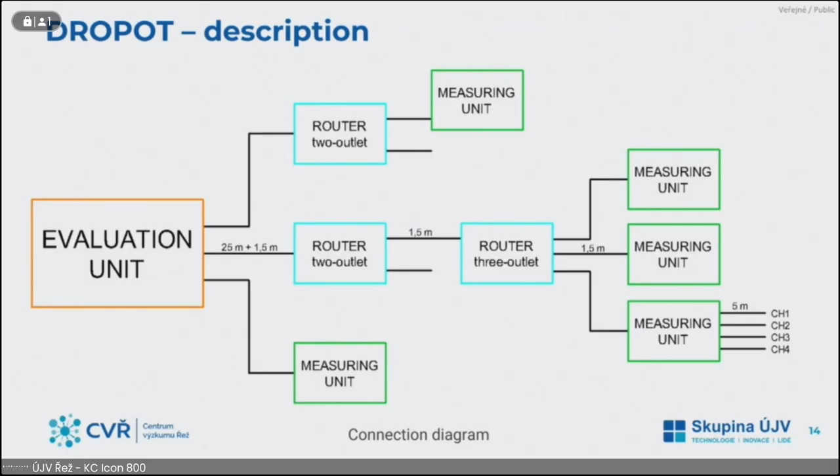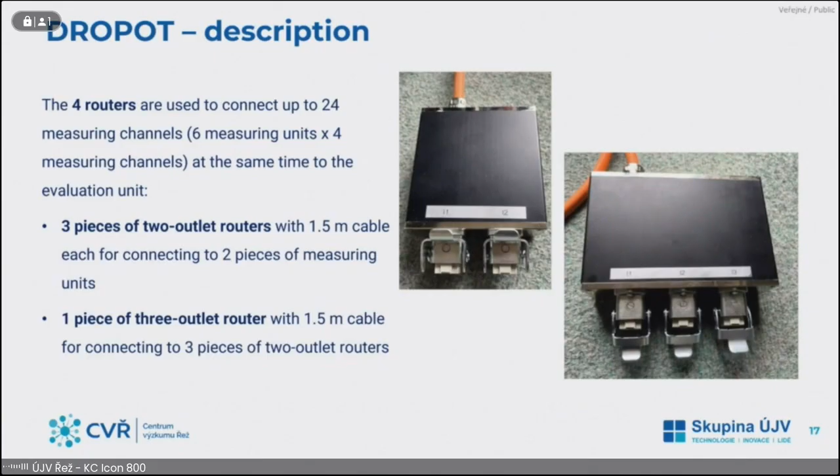In the evaluation unit, this power supply for the complete system by battery pack, and connection, it's possible to use 2 or 3 inlets of the routers.

The developed system uses the DCPD technique for offline crack monitoring up to 550 degrees Celsius. The sensitivity of the system has been verified by laboratory tests, and very important information is that EPRI evaluated this potential drop method as one of the methods for monitoring components of the new generation reactors.

We have the framework of research of the development activities: electrode placement, welding optimization, and impact of the measurement system connection.

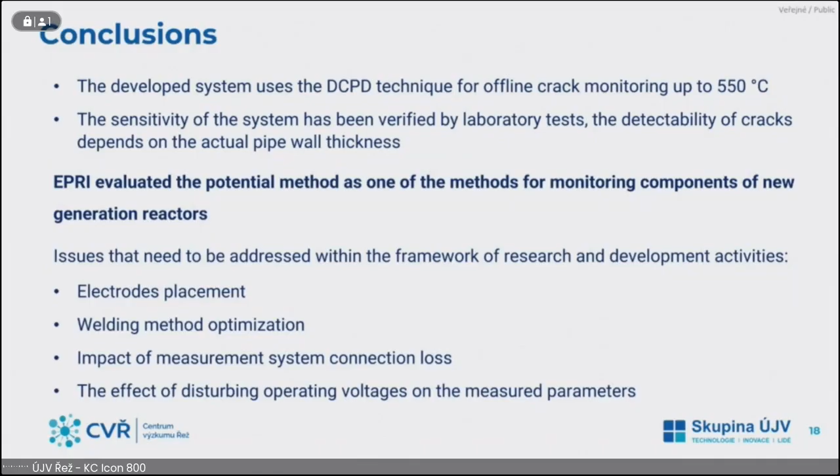And from my side, this is the basic message: this potential drop method has big potential, because this system at the moment is of high quality electronic components, its sensitivity is much higher than maybe 10 years ago. Thank you for your attention.